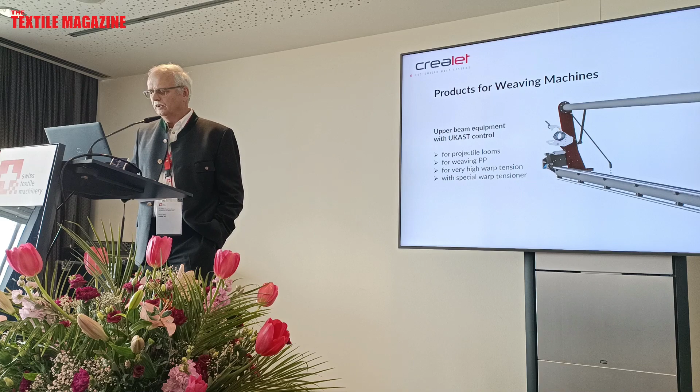We do also warp beam frames which are placed behind the wide weaving machines. If you can add additional beams to the weaving machines, you can get longer running time, and that means a higher efficiency of the machine. Here it's a sample with 4 beams, that means 4 half beams behind also a projectile loom.

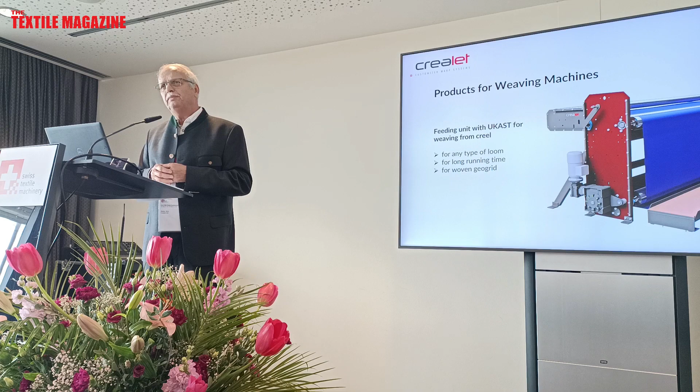Then for wide weaving machines, it's also a possibility to weave from creel. So we have a feeding device which is placed behind the weaving machine and in front of the creel. We pull the yarn from the creel by a take-up roller and feed it to the weaving machine. Weaving from creel is done when the warp beams run out very quickly and the frequency of warp beam changes is very high. Then customers sometimes decide to weave from creel.

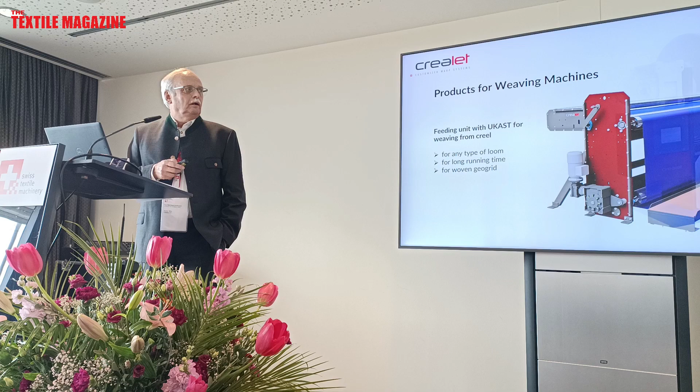Then on to the weaving machine: since approximately 5 years, the loom manufacturers and the customers ask for let-off feeding or for positive feeding of the selvage thread. On the machines, on the left and the right hand side, we have a thread feeder, and you can adjust the tension of this thread feeder.

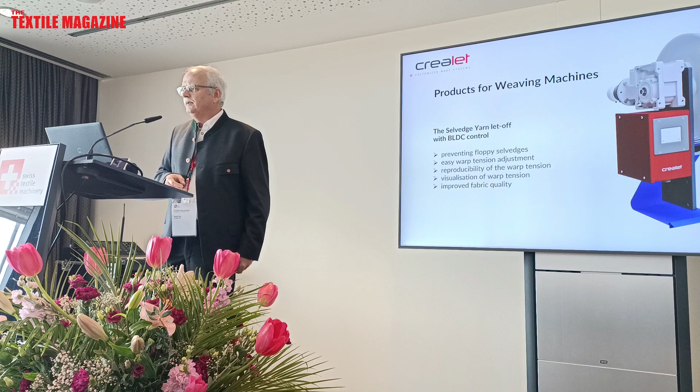Mario and Andreas modified this older system we had to a new one with a display, so you can adjust the tension on the control and the tension will be shown on the display. When high tension or high density fabric is woven, it can happen that we have a problem in the selvage area, because sometimes the selvage area is getting floppy. And if we control the selvage thread, if we give them some more tension, then we can avoid this.

So now to the products we have for the narrow weaving machines, or behind the narrow weaving machines. Last ITMA we introduced the BLDC controller, which is also on this slide, to the market, and it's actually very successful. We measure the tension of the yarn by a load cell, which gives the signal to the control unit, and the control unit drives the beam so that we have a constant tension from full to the empty beam.

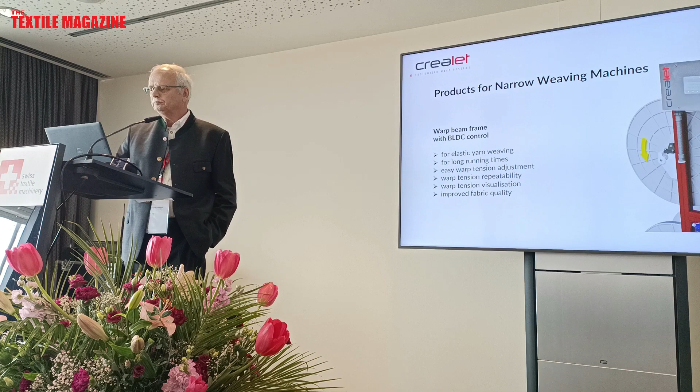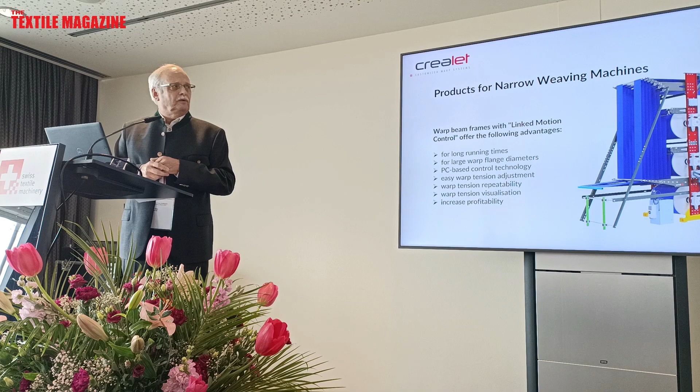The beams are getting bigger and bigger, also in the narrow weaving. Here we have a customer with 6 beams, and for this solution we had to find a new way to control it, and we do it now by a PC, and we call the system with the PC controlled linked motion control. On the PC, each beam can be shown and can be adjusted to the tension you want, so that it can be specified for the fabric we actually want to weave.

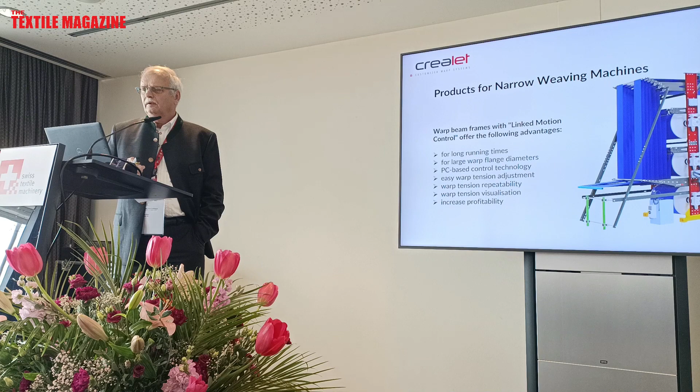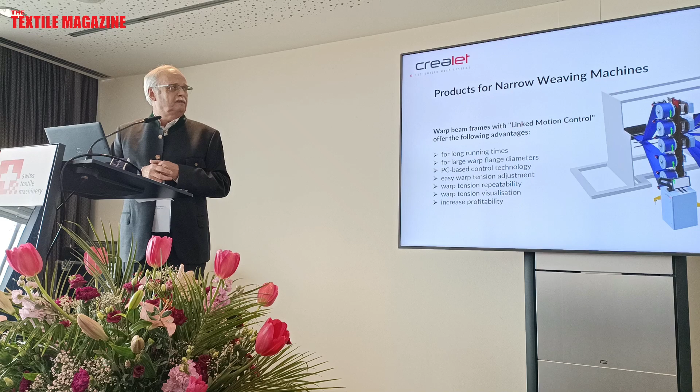Then sometimes, to improve the running time on the narrow weaving machine, customers also ask to weave from wide beams. Wide beams can be placed in a special direction behind the weaving machine. Here we have a sample with 4 beams to make the bands. They are controlled also by the control we introduced to the market last ITMA.

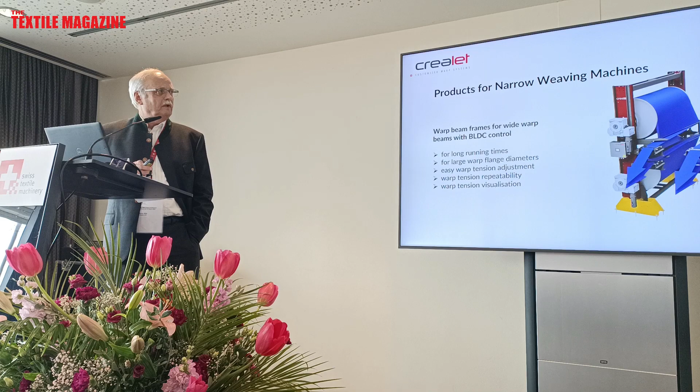And also feeding threads coming from the creel is used in the narrow weaving. Also in this range we have customer-made solutions, and some of them are bigger, and then we have also some small ones for only 10 or 12 threads.

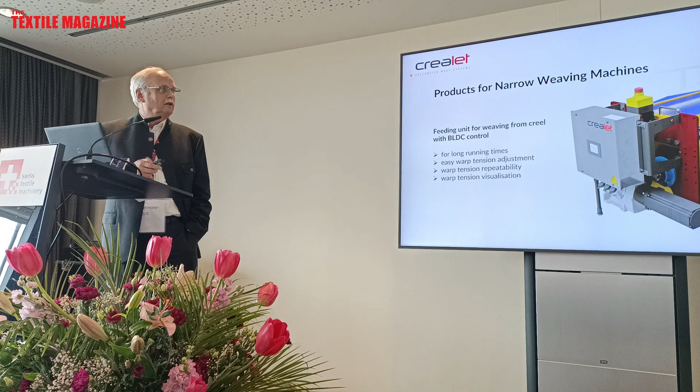Warp knitting is also a market for us. Here you see a solution we made behind the Karl Mayer machine. The customer already had this machine, wanted to add some more beams to have also longer running time, and we made this equipment for him. The demand is different to the weaving machine. We have a much higher yarn speed, and we have to be synchronized with the machine because of the high speed the machine runs.

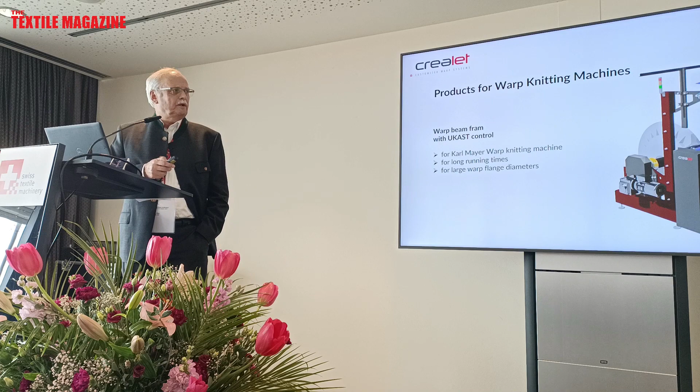Then there is another application for 2 beams, also for a Karl Mayer machine, and on this unit we have for the first time the new LCM controller, which was developed last year.

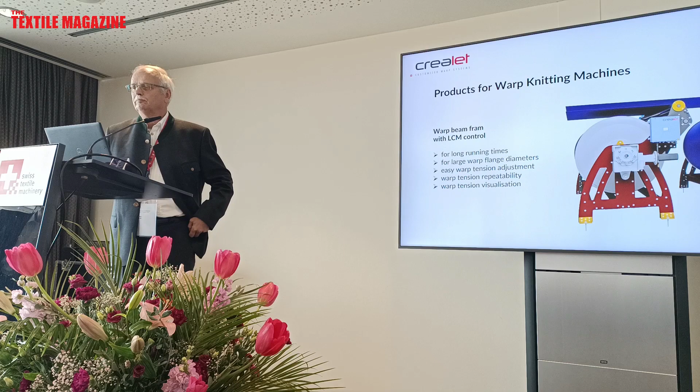And now I'm coming to the ITMA. What are we showing at the ITMA? We have developed a new control unit called ECR. That means electronic control rope brake. Normally, our customers already have such rope brakes, but with weight, and when the beam is getting smaller, the weight has to be changed, and that can be modified by a linear motor.

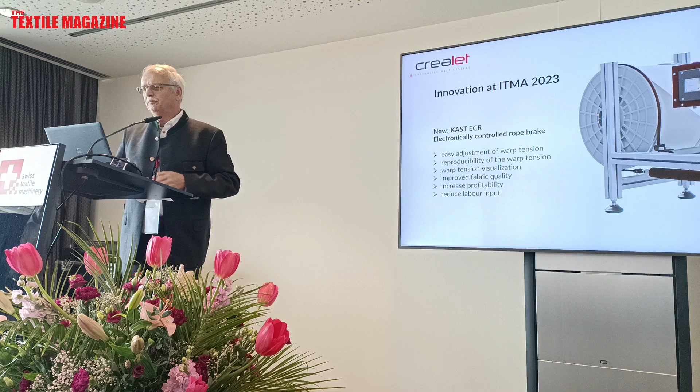And also in this equipment we measure the yarn tension with a load cell, and so we can guarantee a constant warp tension from full to the empty beam. That's the end of my presentation.